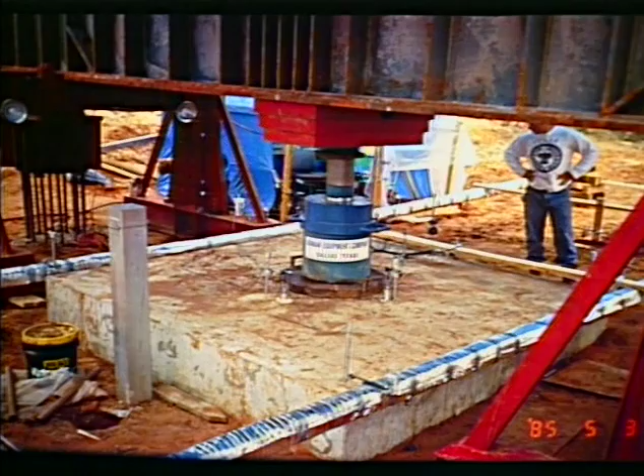The next few slides briefly go over a few research projects that are either ongoing or have recently terminated, to give you a feel for the type of research being accomplished in the department. This first project, many of you may recognize as a spread footing load test at the National Geotechnical site under the direction of Dr. Briaud. One of the hallmarks of the research here is very large-scale testing in the field.

This next slide is representative of a process that Professor Yeung has been working with in terms of extracting contaminants from fine-grained soils using a process called electrokinetic extraction, which I believe he learned at Berkeley under the direction of Professor Mitchell.

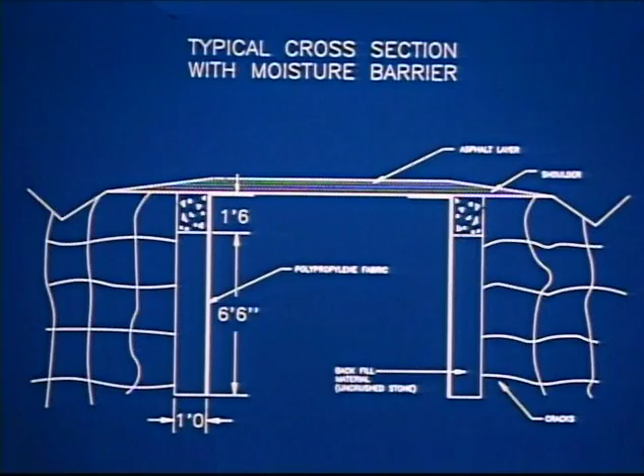The next slide is representative of a moisture barrier that prevents the migration of moisture into and out of the soils underneath an existing pavement, to prevent the heave and collapse of the pavement and its eventual breaking up. Our Professor Lytton has been working for many years on partially saturated soil mechanics and has developed analytical tools.

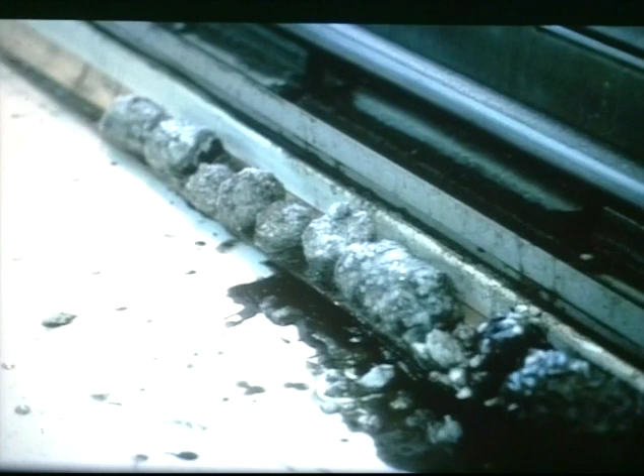The next slide is a picture of hydrates taken from the Gulf of Mexico. Professor Dunlap and Professor Briaud have completed a project looking at the identification and measurement of performance of hydrates in the Gulf of Mexico sediments.

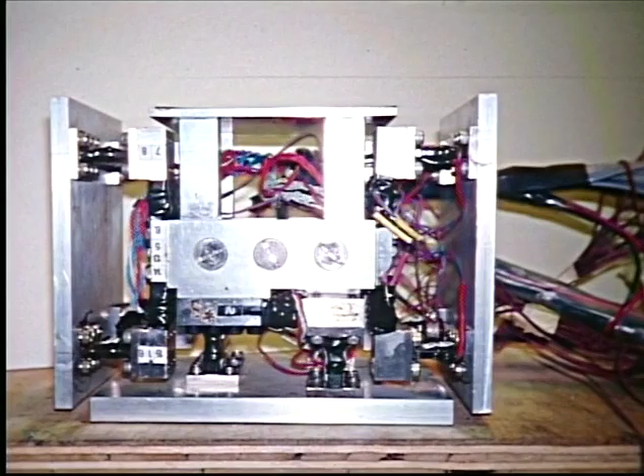Of course, for the oil industry, that's a major problem when they try to drill a well and bring hot oil through the hydrates. They get a phase change, release of gas, and it becomes a real problem in terms of foundations. And finally, we're completing a centrifuge modeling experiment looking at the fundamental behavior of a retaining wall in an earthquake.

This is a side view of an instrumented wall that was built, calibrated, verified, and tested at the Rensselaer Polytechnic Institute Geotechnical Centrifuge, capable of measuring interaction forces in terms of orientation, magnitude, and position along all interaction faces, the backfill, the base, and the toe soils.

In order to talk about the future, the first thing we need to mention is that our department has set a goal to become recognized nationally as a top 5 program. The last rankings that came out, we were about number 12, and we would like to up the ante and get into the top 5.

In order to do that, we have to recognize the nature of the Department of Civil Engineering and understand a process that can help us get to that goal. As a civil engineering department, because there are so many different disciplines, we stand at a crossroads, and it's very possible that if we all march along our own paths, we can diverge and not really accomplish anything.

Fortunately, we have been given some direction, and we have mechanisms in place that help us unify our approaches. In the future, I believe the most significant advances, at least in my tenure as a professor, will be in terms of solving large, complicated problems through integrated research projects.

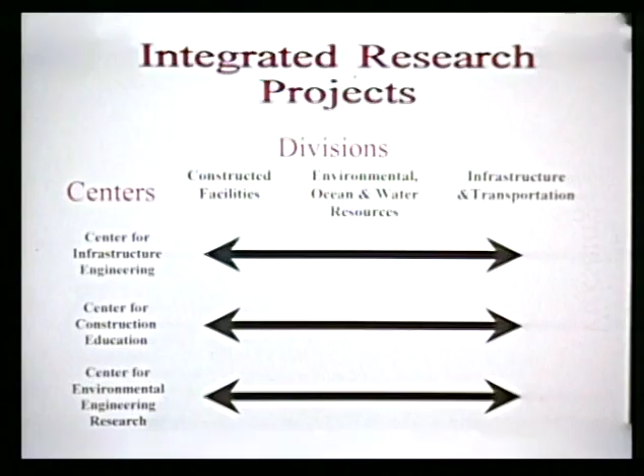For instance, there's a Center for Infrastructure Engineering headed by Professor Lytton that provides an opportunity for us to interact, the geotechnical people interacting with structures, water resources, infrastructure, and transportation. The purpose is to cut across divisional barriers and start marching in common directions. If we do that, we certainly can improve the already high quality of our program.

In terms of the geotechnical contribution to the goal of getting into the top 5, I've listed 5 potential ways we can do that. The first is that every bit of research accomplished at our university should be published in a national or international journal refereed by our peers.

The next thing we can do is go after research projects that are nationally competitive, meaning that if we want to break into this top 5 and there's a professor there submitting a proposal, we stand toe-to-toe with that person and get funded in some cases ahead of them.

In terms of our theses and dissertations, they should be competitive. We should be able to take a PhD thesis from the Department of Civil Engineering at Texas A&M and put it right next to one from MIT, and there should be no difference in terms of content, merit, or effort. That's something that will make us competitive.

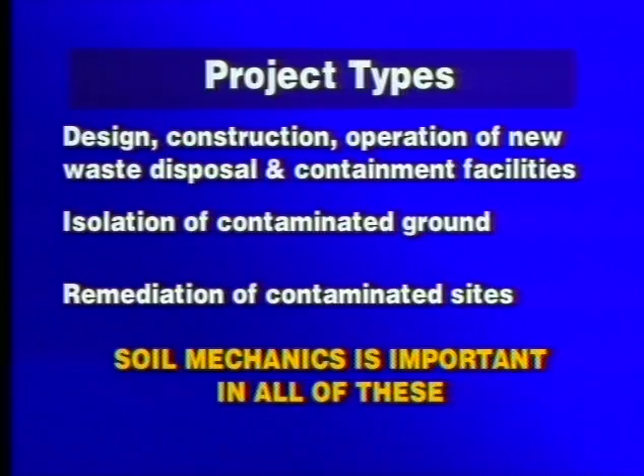And it's this kind of mechanics that I would like to elaborate on. There are a number of kinds of projects that dominate in the environmental geotechnical field: the design, construction, and operation of new waste disposal and waste containment facilities, the isolation of contaminated ground, and the remediation of contaminated sites. The whole point of this third Buchanan lecture is that soil mechanics is important in all of these. I could stop here, and if my message were completely absorbed and reflected upon, it would be over. But I want to elaborate a bit and show you by illustration why soil mechanics is important in all of those things.

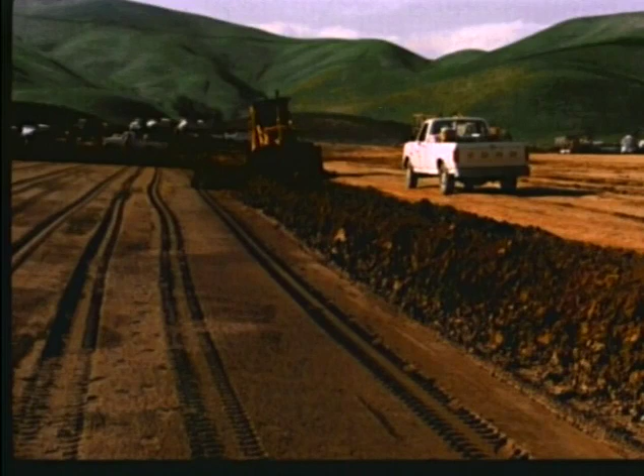Now, first, to give you an illustration of these kinds of projects, here is a new waste disposal project. This happens to be the Keller Canyon Landfill, located in the county in California where I used to live, a new municipal waste disposal facility completed about 2 or 3 years ago.

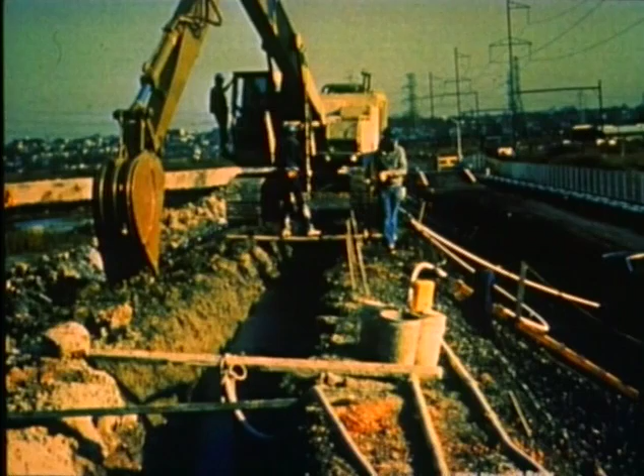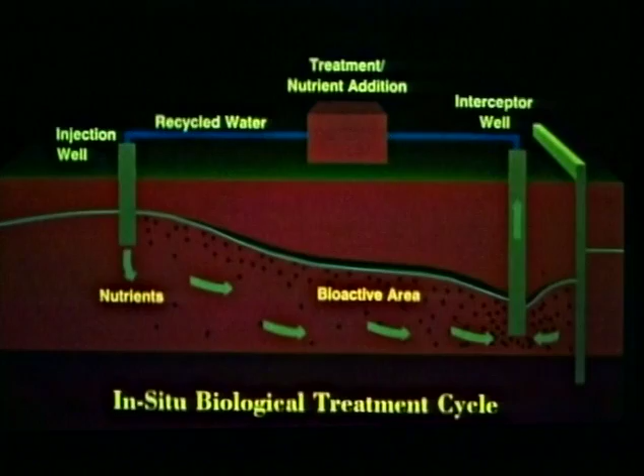For isolation and containment of contaminated sites, we often use things like slurry wall cutoffs, such as you see here. For remediation of the environment, we might use some sort of in situ biological treatment, or an electrokinetic technique of the type that Albert is involved in here in his research at Texas A&M. So these are three of the kinds of projects we deal with in our work.

This happens to be a very large above-ground landfill located in the center of Los Angeles, currently the subject of a great deal of study. I'll tell you more about that later.

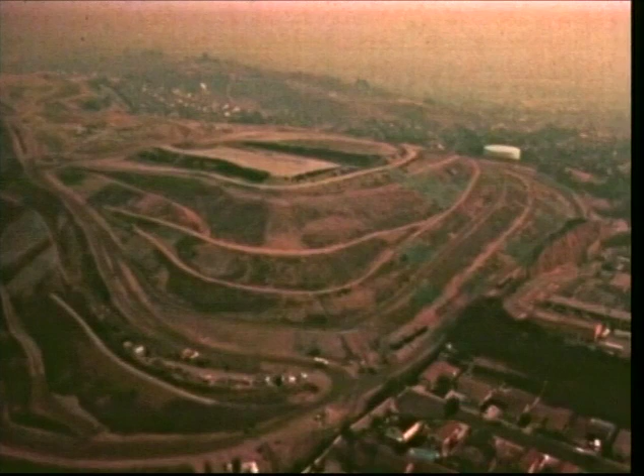Other kinds of landfill repositories are in the ground, such as you see here. Here is an illustration of a Class 1 hazardous waste landfill located in Central California. I'll have a bit more to say about this one as well. The waste is piled in here, contained within a lined, carefully designed and lined repository system.

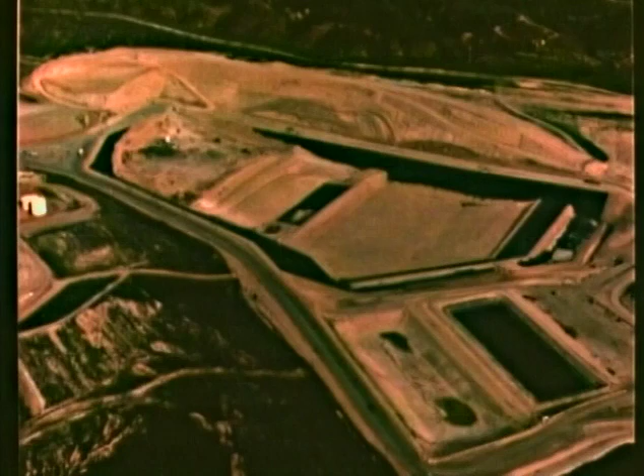We have a number of concerns with these waste landfills. We must contain the leachate, prevent surface water infiltration, maintain stability, and resist seismic shaking. You may think of some others, but we'll look at a few of these.

The landfill requirements have evolved very significantly over a 10-year period shown on this slide, from 1981 to 1991. If you look at this, it's waste over filter soil, over gravel with a perforated pipe, over clay, over subsoil. You can't do things that simply anymore. And even this is complicated compared to what I remember as a kid, where you had a town dump.

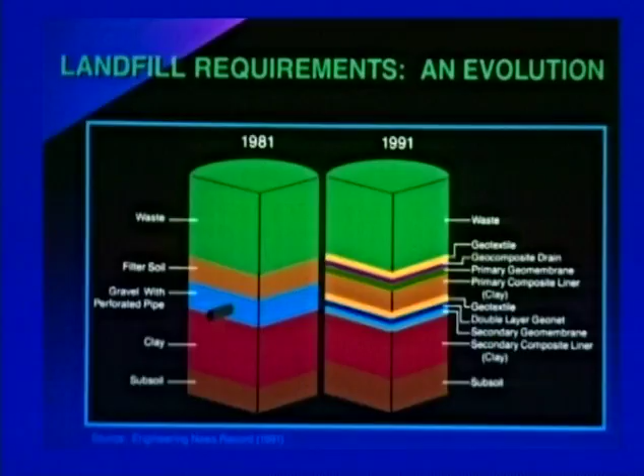By 1991, we were looking at complex composite systems of geosynthetics, compacted clay, collection and drainage systems, and so on, not only once but twice within a landfill liner, according to some legislative requirements. So there has been a real development into more complex engineered systems for lining landfills.

Similarly, for covering landfills, we have to turn our attention to what would make a good cover. In this cover, before you even get to the waste down here, you have some soil cover, a geomembrane to keep the water out, a bedding layer, a drainage layer to help things drain away, a filter to keep things from mixing up, and a topsoil layer so that you can grow things on top and leave a suitable facility when all is closed up and said and done.

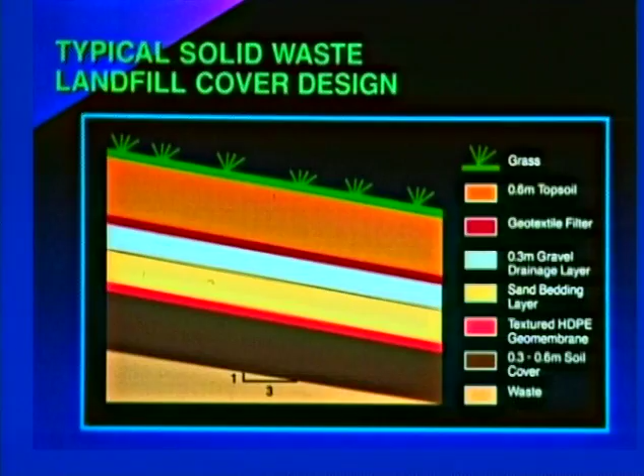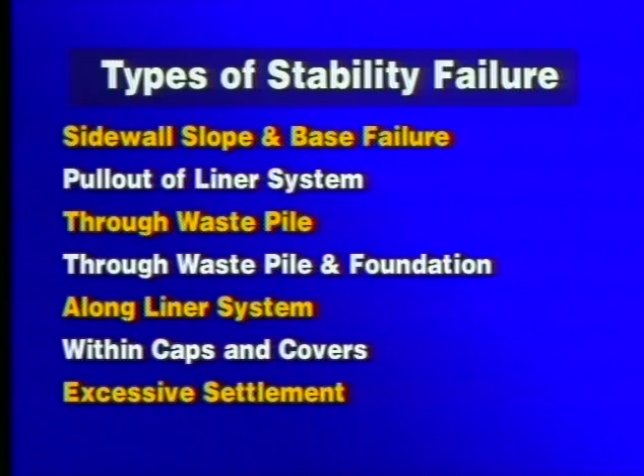One of the main problems that we have to deal with in landfills nowadays is that of the stability of different parts of the facility. This is a list of the kinds of failures that can occur in modern landfills, or existing old landfills for that matter. I'll show you by means of simple sketches what I mean.

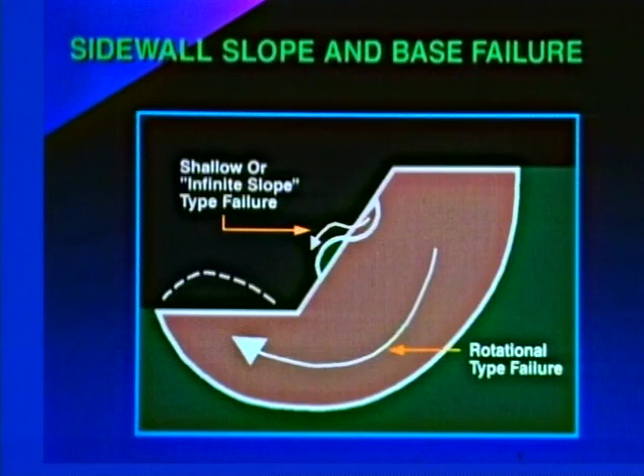Sidewall slope and base failure: when you have an excavation here, while the excavation is open, it's possible to have this type of stability failure or superficial failure. We have to worry about the pull-out of liner components coming down the side of our slope into the waste repository area, which could pull out of the trench and go on down the slope. There are techniques for designing against that type of failure.

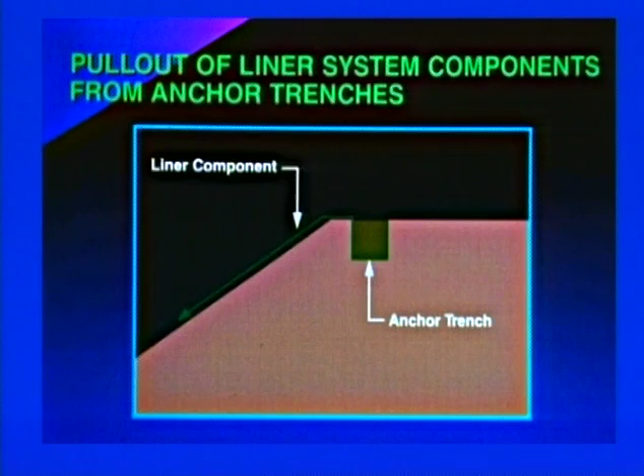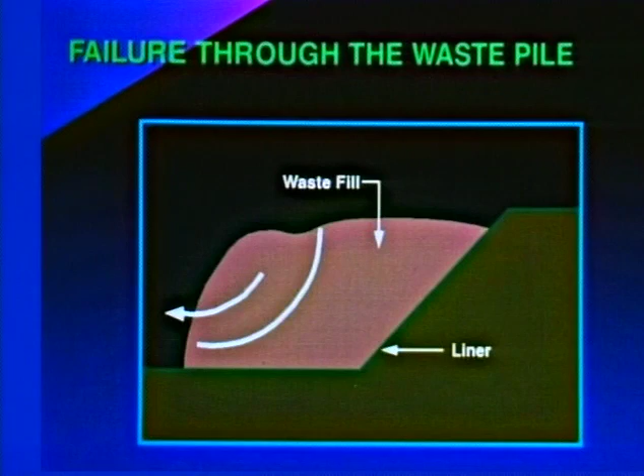We could have failure through the waste fill itself, such as shown schematically here. The failure could be more complex, coming through the waste fill, through the base liner, through the foundation, and so on. There are many variations on this possibility.

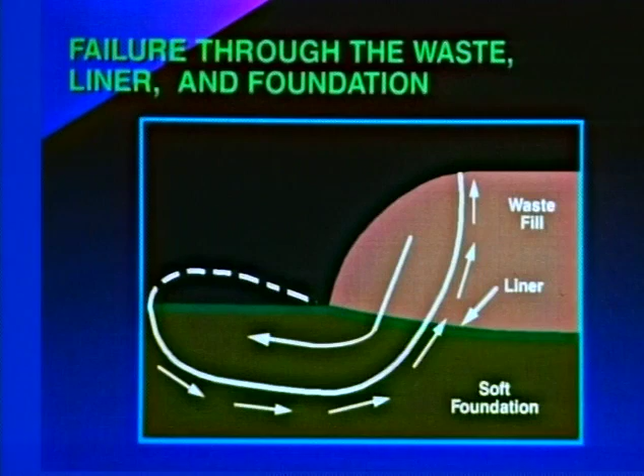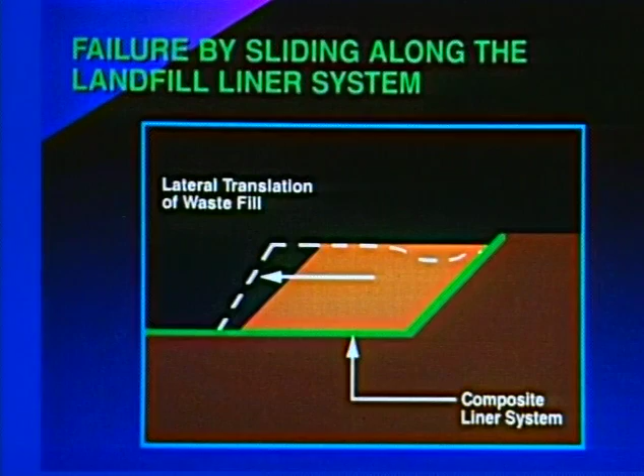It wasn't always that these kinds of stability considerations were taken fully into account, and you're going to see the consequences of that in one of the examples I will show you. It's an example showing this kind of stability failure, where the waste pile actually slides simply because it gets too high, and it can't be resisted by the resistance along the bottom of the lining system, and it moves and causes a failure. Those are the types of things we have with landfills.

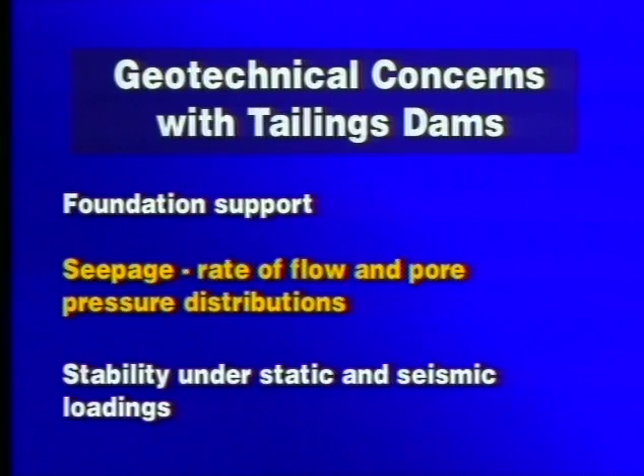We've chosen some cases of those kinds of systems for examination of the role of soil mechanics. We've looked also at some concerns with tailings dams, because these are important geotechnical structures as well in many parts of the world. We have a number of issues of concern here relating to foundation support, seepage, stability under static and seismic loads, and so on.

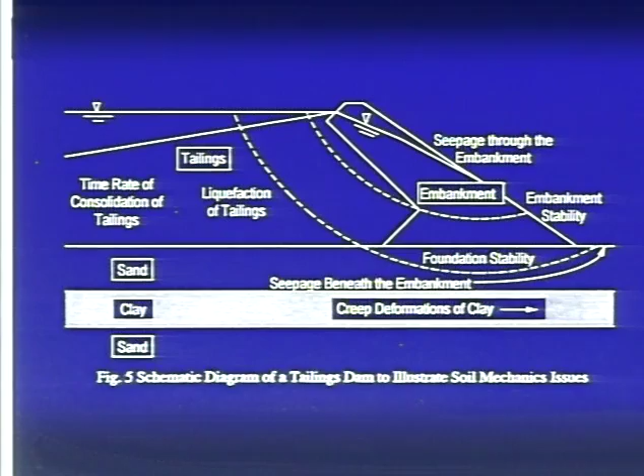In a tailings structure, there are a number of things we have to look at. If this is the tailings dam embankment, we have to be concerned about the stability of that embankment, the seepage through it, and potential creep deformations in the foundation. I know of a case where these are important. What about the overall stability of the foundation? How about the consolidation of the tailings?

Generally we want the tailings to consolidate for at least two reasons: one, they become stronger and thereby reduce stability concerns; another is that by consolidating, you gain more airspace above and can dispose of more tailings. In seismic areas, which seem to be very often associated with locations where mine tailings operations are in progress, we have to be concerned about liquefaction and its potential consequences on the overall stability of everything. So there are a lot of environmental concerns in dealing with tailings facilities, and many of these involve soil mechanics issues.

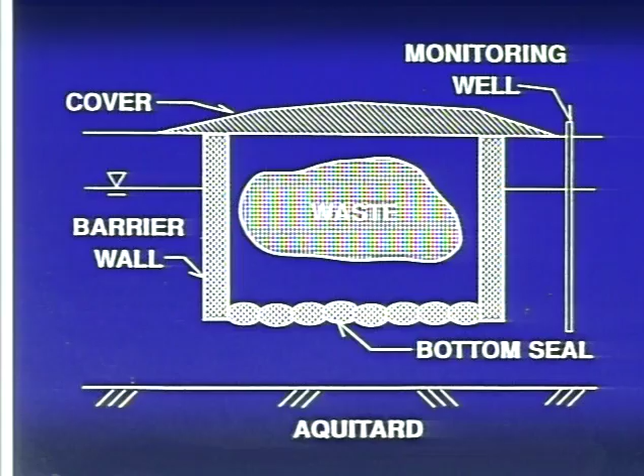A third category of environmental problem that we as geotechnical folks get much involved with is the in situ isolation and containment, safe containment of waste in the ground. Barrier systems of various types are now available. They can be built, and we need to know their characteristics—how perfect or imperfect they are as barriers against seepage flow out or in. We get concerned about the bottom, whether we can use a natural bottom or must put in an artificial bottom, and about the cover, all to be sure we can safely contain the waste in the ground. It's quite a technology in itself.

This is an interesting photograph. This happens to be the present day appearance of Love Canal in Niagara Falls, where much of what we are into now has its origins. If you recall a bit of history, back when all the ground pollution was discovered here in the Love Canal area of Niagara Falls, people were getting sick. Hooker Chemical Company was involved in all of this. They did massive restorations of the area, had to move people out, and clean things up. Now they have it contained.

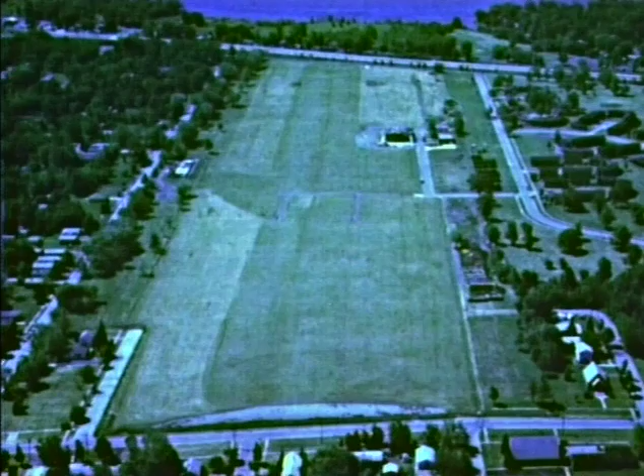This is a modern cover over the area that was most contaminated. Leachate is pulled out of this and treated in this facility over here. So this is a historical project from the standpoint of moving things in a particular direction for environmental regulation and environmental control.

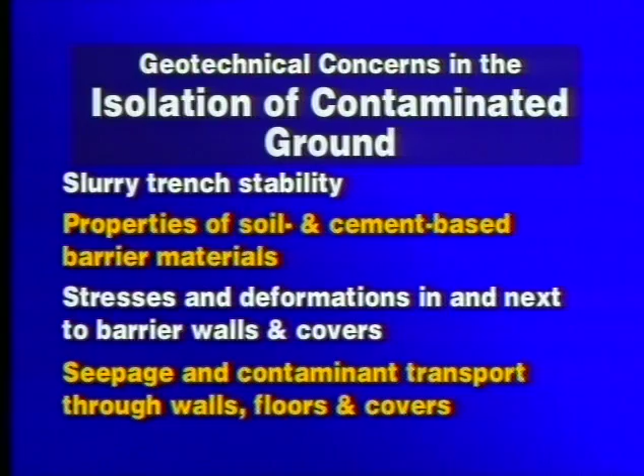In these issues of isolation of contaminated ground, we have a number of concerns: slurry trench stabilities, properties of soil and cement-based barrier materials, stresses and deformations in and next to barrier walls and covers, seepage and contaminant transport through the walls, the floors, and the covers.

These are things that geotechnical people are uniquely qualified to deal with. There is a lot of soil mechanics involved. I'm going to try to illustrate, by means of several examples, the kinds of issues that arise requiring good soil mechanics in solving these problems, interpreting what's going on, making predictions, as for any other kind of geotechnical engineering. I'll do this by considering landfills and some tailings dams issues, with a couple of other things that don't really fit those categories.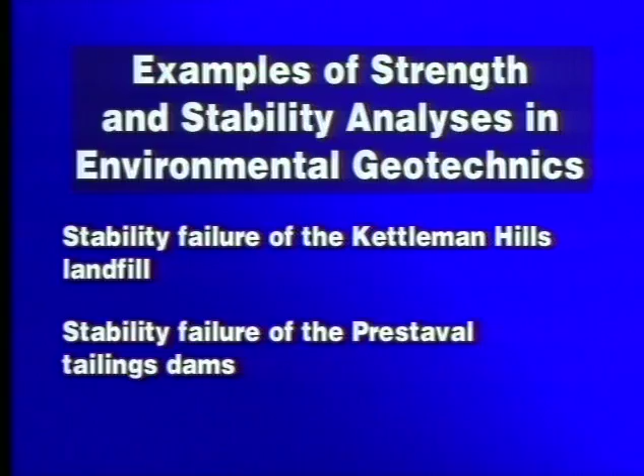Before I do that, I want to say one thing. I'm not going to be dealing with material properties as such in any detail in this talk. That's not to say I don't consider them important. In fact, I would say the two most important things you have to deal with in any of these problems are the site characterization and the properties of the materials themselves. If you don't do that right, anything else in the way of analysis will be absolutely meaningless.

Just as in our teaching of geotechnical subjects, we must spend a third to a half of our time talking about the properties of soils and how to measure them, express them, and deal with them in analysis. We have to do that because soils are so vast and variable in their characteristics and the ranges of materials we can run into. It's not like working with cement, concrete, or steel, which we can pretty much design to specification. So always keep in mind the importance of properties.

I'd like to show you a couple of aspects relating to strength and stability analyses and their importance in environmental geotechnics. First, a little bit about this landfill, the Kettleman Hills Unit B19 Phase 1 of a hazardous waste facility in Central California.

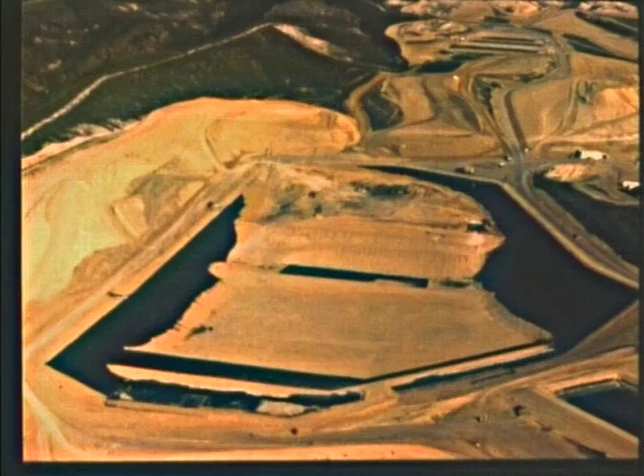What you're looking at is a waste pile photographed about 4 days before it failed by means of a translation in this direction of about 35 feet, a settlement back up here of about 15 feet, and a complete disruption of the lining system, as you will see in one of the slides. Note the shape of this runoff retention pond down here — I'll show you in another slide how it's distorted, to give you some perspective.

This waste pile is about 100 feet high — it was about 100 feet high. It covers, I can't remember the number of acres, but you'll see it on a slide. This side slope is 3-to-1, this is 2-to-1, and that's 2-to-1 in the back, just so you'll have some appreciation for the geometry. It's 50,000 square meters, fill depth was 30 meters. The side slopes, the toe slopes, were 3-to-1, with a nearly level planar base.

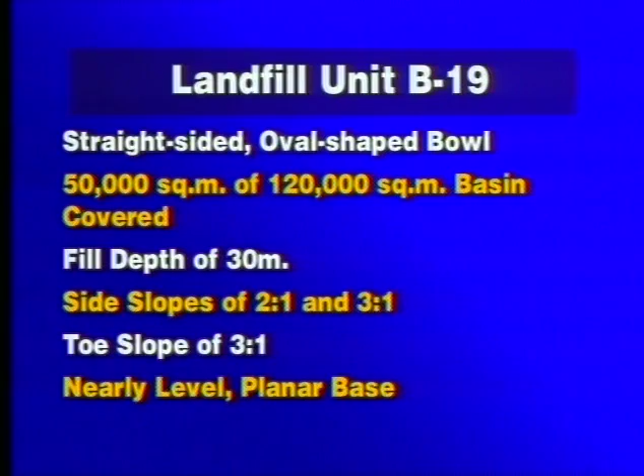It had about a 2% slope towards collection sumps for leachate in the base. It failed in March of 1988 by sliding, and you can see how everything is pulled down. It moved from your right to your left about 35 feet. This happened over a period of something like 5-6 hours on a Saturday morning, and was not catastrophic in terms of loss of life, but in terms of compromising the integrity of the lining system it was a very important event.

It's had a major impact on how we do landfills. If you look across here, you can see some cracking and so on. Trying to figure out the cause of this failure required looking at an awful lot of things in this particular system.

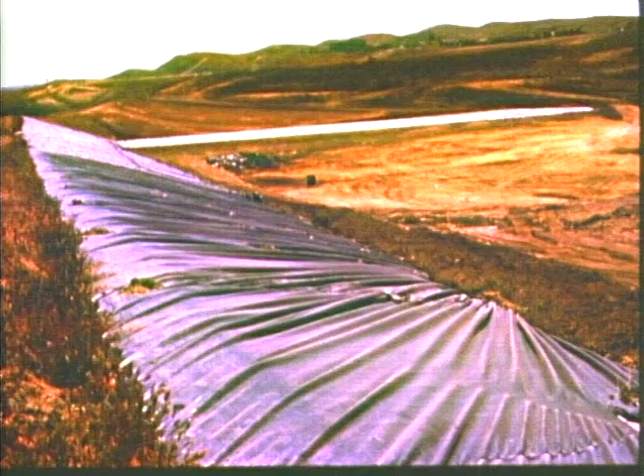You can see in this slide how the surface cover liner, which lies over the base liner, is distorted right here, and it moved in that direction through the valley. The lining system at this facility was a very complicated thing designed to current state-of-the-art standards and regulatory standards. Down here is a vadose zone monitoring system.

It's in the paper, so I'll go quickly over this: the secondary clay liner here with a high-density polyethylene flexible membrane layer, so it's a composite liner, with the membrane over the clay. Drainage collection removal system here. Primary clay composite liner up here, primary composite liner, compacted clay, 1.5 millimeter thick HDPE right here. So you see this is a real belt and suspenders operation with a double composite liner system for the leachate collection, removal, and so on. Finally, up here, the waste is collected on top of everything.

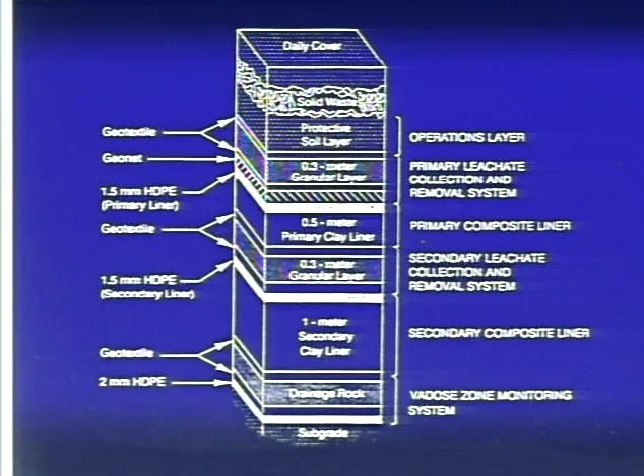As the investigation finally resolved itself, we know that the sliding took place right here, in the base of this repository, between the secondary FML, or the HDPE, and the compacted clay. Of course, we couldn't know that at the beginning. All we could be reasonably sure of was that it probably slid somewhere in the lining system.

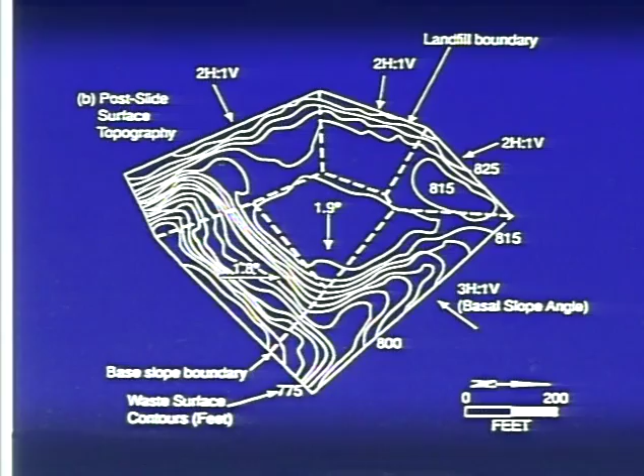This is simply a contour diagram of the waste itself before it failed and after it failed, and you can look at the topography. They're in the written version, and you can see what these were, and they pretty much support the movements that I told you about.

Trying to unravel the mysteries of how this failed and why it failed led us to an explanation which was basically correct in terms of how it slid, where it slid, and the like, but you couldn't be sure till they excavated all the waste out of the repository and moved it somewhere else. That took a couple of years after the failure.

By having some marker beds within the structure, we could learn something about the internal configuration of things and develop a model for the stability analysis of this.

But you might ask yourself, how will we analyze the stability of this? We're used to using a two-dimensional cross-section of some sort to do the stability analysis. Where will you take that section? That becomes critically important. Or should we look at the whole thing as a three-dimensional mass? We had to consider all of that, and in the end, it was necessary to do some three-dimensional analyses and resolve the issues, getting some idea of how well they compared with the two-dimensional results.

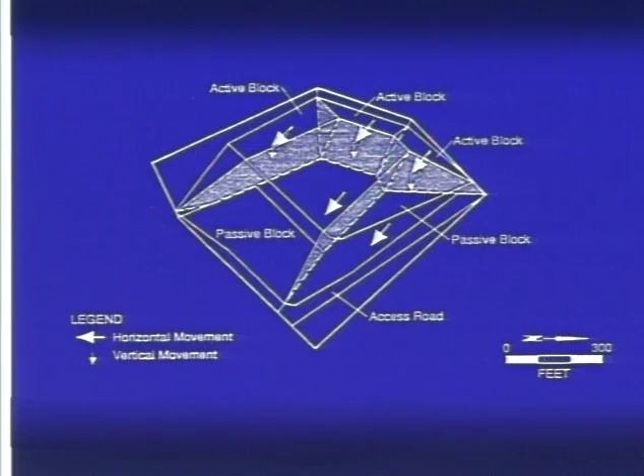Basically what you're looking at is a situation where you have a waste pile with this configuration, and these blocks of waste are sliding down. There's waste that sits in the bottom on top of the liner, which is a passive block holding it back, and you have things coming down from the rear, sliding in from the side, and so on, all pushing on this. In the end, the final analysis showed us that simply the pile of waste got too high and the driving forces exceeded the resisting forces.

And of course, you don't have to be a rocket scientist to know that things fail when the resisting forces aren't as great as the driving forces. But still, writing it all out, or analyzing it all in a quantitatively satisfactory manner, was a bit of a challenge.

Looking at this thing in plan, you have waste coming down the slope, waste coming down the slope, waste coming down the slope, and this block in here resisting it. There are configurations, there are geometries, when these forces simply overwhelm the resisting forces and the thing slides. So when you have a repository with diverging side slopes, as was the case here, you can have a critical three-dimensional case that leads to failure.

Without going into the details of that failure, we can draw certain conclusions that are important to us in dealing with the stability of waste repositories. In the written version, we were careful to include references to all of these things, so that anybody interested in pursuing any of the subjects in further detail can find them in the references. For those interested in this subject in general, and for students, we've tried to include references to fairly recent publications that are comprehensive, providing an entree into a vast array of relevant previous literature. So hopefully that will be helpful.

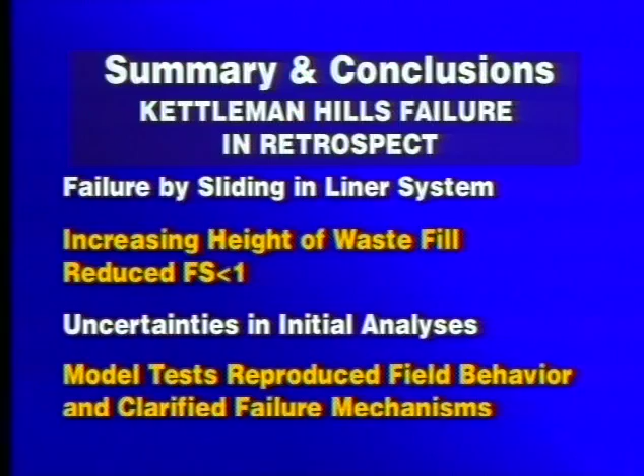We had a lot of uncertainty in our initial analyses, and that led us to do model tests, which reproduced the behavior and clarified the mechanisms very nicely. We developed a new 3D stability analysis method, which predicted both the model and field behavior. That is a method for 3D analysis limited to analyzing waste masses on defined sliding surfaces. You can't do a general search for a critical surface, but if you know where the sliding is likely to take place, you can do the analysis with this program.

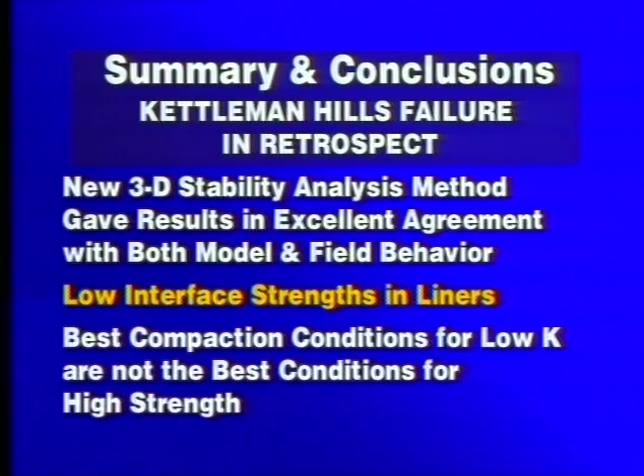We certainly learned all about low interface strengths in liners, and I think this was an important focus as a result of this work. Before the Kettleman Hills failure in 1988, concern in landfill liner systems seemed to be with low hydraulic conductivity - keep the hydraulic conductivity low. So you compact the clay wet of optimum moisture content to get the low hydraulic conductivity, but when you do that, what you get is low strength too. It's optimum for hydraulic conductivity, but it's one of the worst places to compact it for strength considerations.

When you're dealing with clay compacted wet of optimum, or geosynthetic liners with geogrids and flexible membrane layers and things of that sort, you're dealing with material with very low friction angles, down as low as 8 degrees or so. And remember, the side slopes in this landfill repository were up to 26.7 degrees on that 2-to-1 slope.

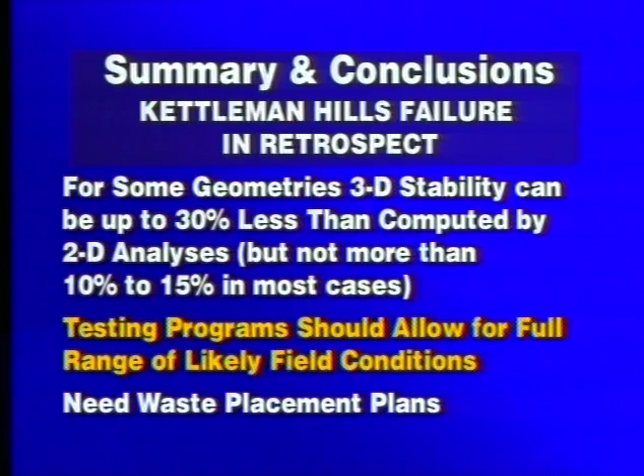We found this condition relative to geometries and stability: typically the two-dimensional analysis will be okay unless you have divergent side slopes, in which case you can have lower 3D factors of safety than 2D. So if you're looking at a situation like that, be conservative if you're going to base a design on a 2D analysis. These things, I think, are now fairly obvious, as shown here. So those are some of the things we learned about from Kettleman Hills.

Now let's turn our attention to a tailings dam failure - a limit equilibrium analysis situation where soil mechanics limit equilibrium would have paid rich dividends. I hope you forgive me if I read some of these things. We took the liberty of finding illustrations not totally from our own experience, but including also some relevant cases in the literature, and this happens to be one of those cases.

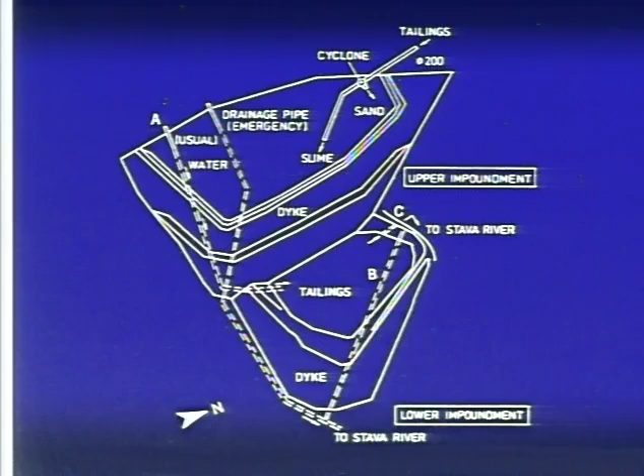In June of 85, the decant pipe for the lower embankment, which had been draining everything out, broke and drained all the free water and liquid mud from the lower impoundment. They repaired it by blocking up some pipes, installing new bypasses and the like, and refilled everything on the 15th of July in 1985.

Four days later, after they filled it, there was a failure that took out pretty much all of this. There was a slide of the upper dam, which pushed away nearly the entire body of the lower dam and caused a catastrophic failure. The number of deaths was several hundred, as I recall. It was quite a catastrophe in Europe, the worst of its kind to date.

Following the failure of these Prestavel tailings dams, they did their analyses. There were uncertainties in properties that resulted in uncertainties in calculated factors of safety, but what they came out with were factors of safety for the lower embankment in the range of 0.92 to 1.4. They calculated factors of safety up here in the range of 0.7 to 1.3, with a mean of about 1.0.

In other words, at the time of failure, the analyses done post-failure said there should have been a failure, such that any slight change in geometry or loading conditions would trigger a failure at that particular point where it actually took place. Berti and others, in the references given in the paper, concluded that there were shortcomings in the design, construction, and operation of these dams.

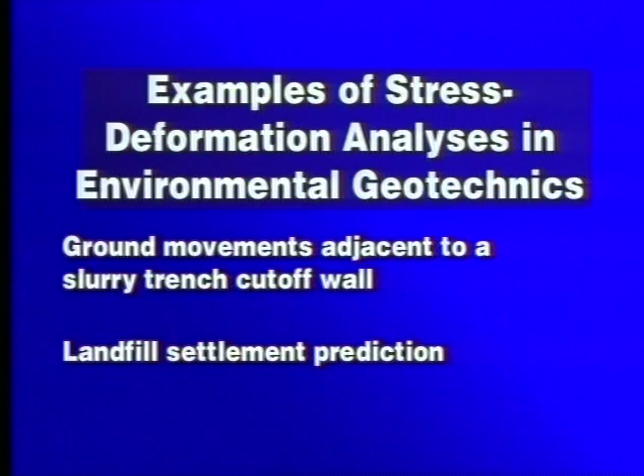We aren't necessarily always concerned with catastrophic failure or limit equilibrium conditions. We may many times be concerned simply with stress-deformation analyses, and there are situations in environmental geotechnics where these things are important. I'll tell you briefly about two things: ground movements adjacent to a slurry trench cutoff wall, and landfill settlement prediction.

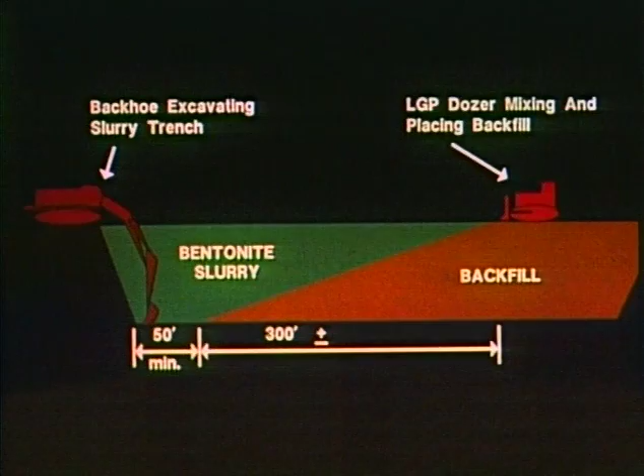The first is going to be in relation to a slurry trench cutoff wall. This was a wall constructed at a contaminated site in Silicon Valley, California. The purpose was to prevent on-site chemicals from moving off-site in a down-gradient direction, and to prevent up-gradient off-site chemicals from moving onto the site. We don't want our neighbors' chemicals on our site, and they don't want ours on theirs downstream.

There was a building located adjacent to the trench that was built at this site, and deformations around the trench caused severe damage to that building. It caused them to shut down manufacturing operations. The building was badly damaged, and the inevitable lawsuit resulted.

I'm going to show you more details of the stratigraphy at the site in connection with a groundwater issue that I'll talk about in a bit, so I won't do that now. I'll simply tell you that the wall at this site was 30 meters deep.

It was intended, as I indicated, to isolate waste within and prevent stuff coming in from without. The wall width was something of the order of 0.9 meters, a 3-foot nominal width wall, and it was 1,000 meters long, surrounding the site.

The technique used for constructing the wall, to half its depth, was the backhoe kind of arrangement that I showed you in the preceding slide. The bottom part was constructed using a clamshell for excavation purposes.

The stability of the trenches here was maintained using a bentonite water slurry. After excavation to the appropriate depth, the excavated material was mixed with bentonite, 2% bentonite, mixed up to about 125 millimeter slump, and put back into the trench, displacing the slurry in order to make the slurry cutoff, or soil-bentonite cutoff material.

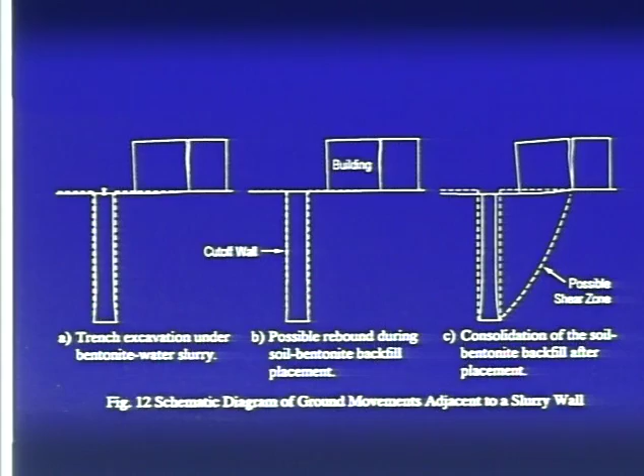There was some suggestion in one section that it was very near to failure, in a manner something like this. The upshot of the whole thing was that the building underwent excessive distress.

Now, the analysis of those deformations and their predictions is not a trivial exercise. It's a difficult problem that is being looked at now, especially by my colleague George Filz, who wrote up this particular part for us. He was much involved at the time and is continuing research on the behavior of slurries and slurry backfills in these slurry trenches, in an attempt to, through rational analysis and understanding of properties, come up with better predictive schemes for figuring out what's going to happen when you make these kinds of cutoffs. That's particularly important when you have structures or other developments adjacent to whatever it is you want to do.

That's one example of deformations.

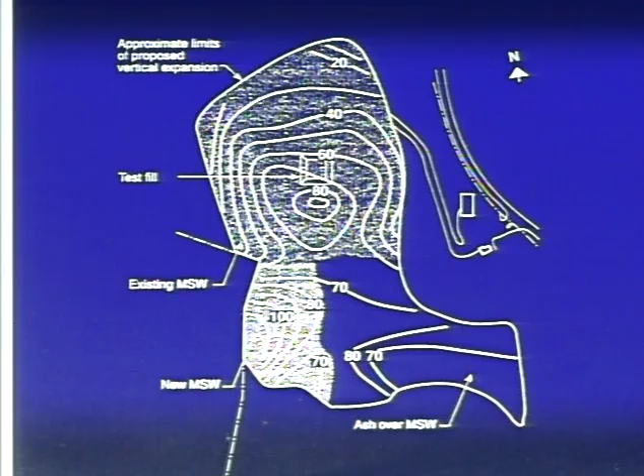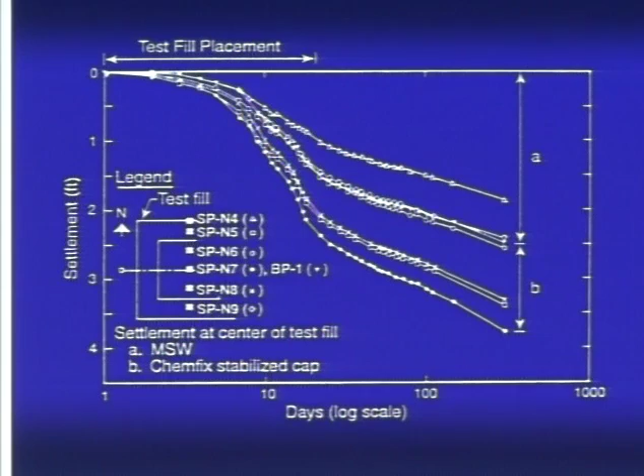One of the ways they got information about the compressibility of the waste was by means of a test fill. From the test fill, they got these settlement contours, or settlement patterns, as a function of time for different parts in the fill, at different times - 10, 18, 20-something, 99 days after putting the load on the test fill. This provided field test information about the time rate of settlement of this municipal waste landfill under loads, and showed the contour distribution across the landfill.

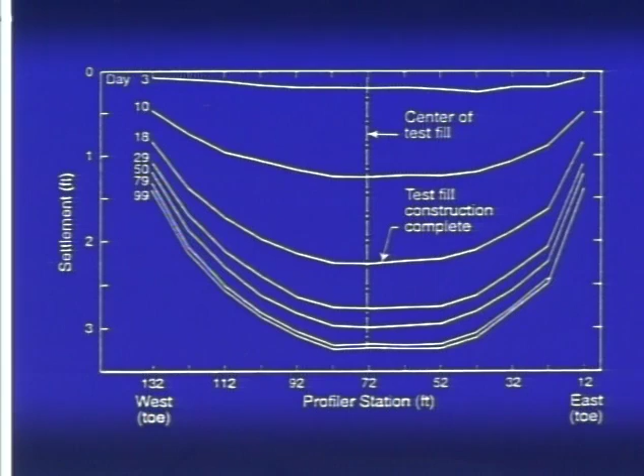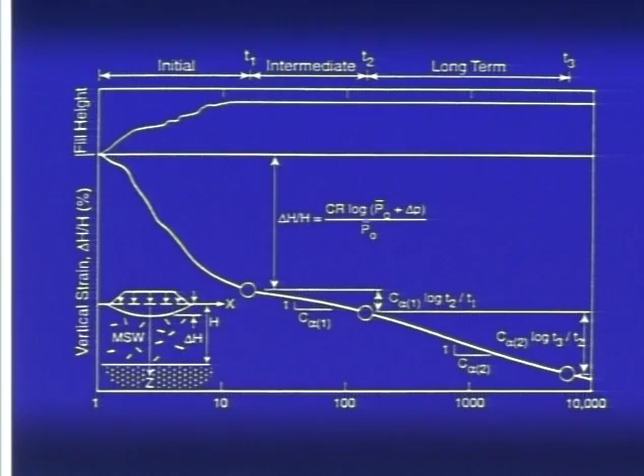And the output of all that was guidance for them to be able to go ahead and work out the design schemes for the collection, removal, and gas systems, and all of those kinds of things that were needed.

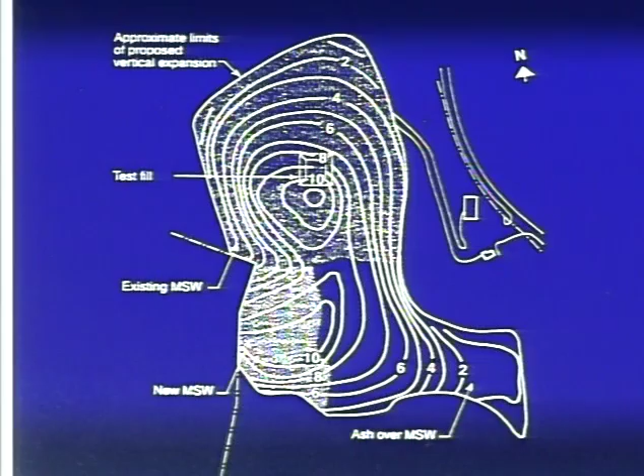Now I will show you two examples of seepage and contaminant transport and their important role in environmental geotechnics. There's an interesting aspect when you get into seepage. If you think about a lot of the work we do, we get very much concerned with seepage quantities. We need to know about pore pressure distributions and the like, often for analyzing dewatering issues or perhaps leakage through a dam. We are very often forced to deal in terms of quantities to the nearest, say, half an order of magnitude, because of the great uncertainties in predicting hydraulic conductivities and flows in real situations.

It's a very difficult problem, and we can live with that in many cases. The problem when you're confronted by some environmental problems is that if contaminants are being transported from one place to another, you may be looking at concentrations of parts per million or parts per billion to satisfy some regulatory requirement. You have to try to be much more precise in what you're calculating and estimating. I'm not sure we really can be much more precise, but you at least have to try to know your properties better and better model what's going on.

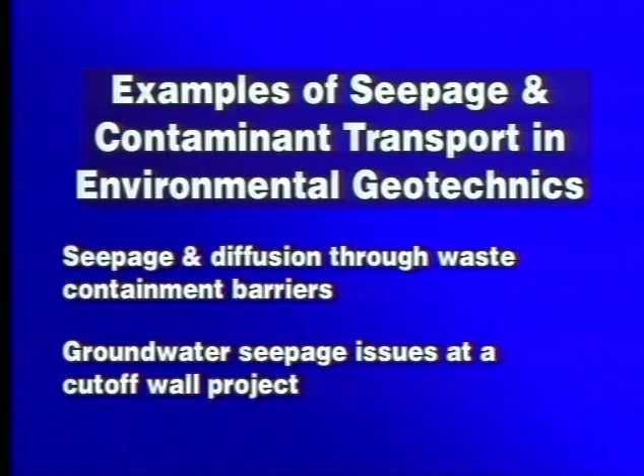The next point I want to make with respect to seepage and contaminant transport is that diffusion through waste containment barriers may be a very important component of contaminant transport. We have to broaden our traditional soil mechanics way of thinking of just advection, which is contaminants carried with flowing water, to include also diffusion, which is chemically driven flow, because it can be important. I want to show you a case that illustrates this.

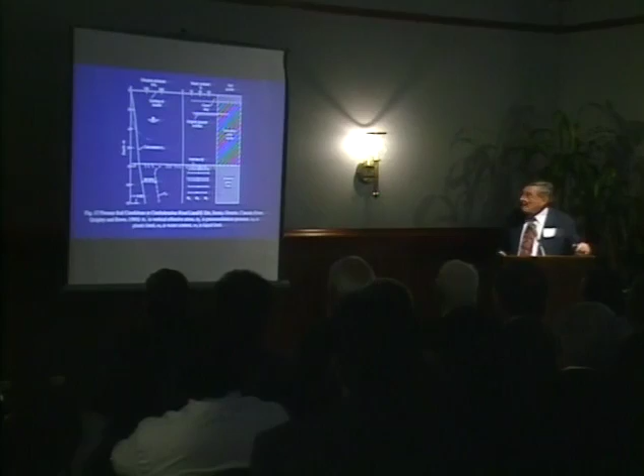This is reported by Quigley and Rowe and others in related papers working out of the University of Western Ontario. They analyzed what was happening at a site where domestic solid waste had been placed over a massive gray clay, the bottom seepage barrier at this location in the Sarnia, Ontario landfill. The properties of the soil are shown—plastic limit, water content, liquid limit, pre-consolidation pressures, and pressure distributions—and the waste is piled up to a depth of about 7.5 meters.

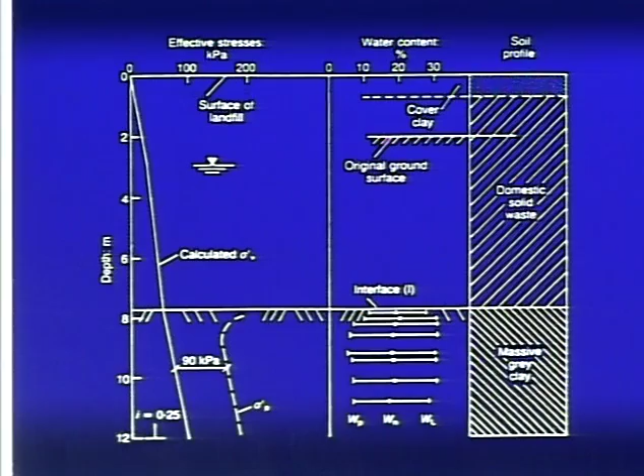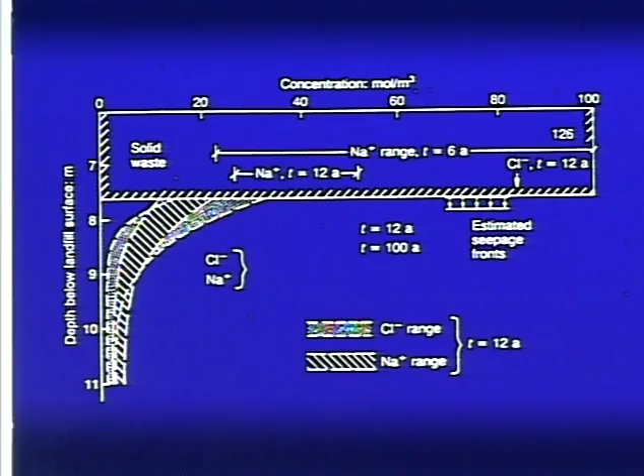The important thing is to note the migration of salts from that waste by diffusion, compared with what was transported by seepage, just moving with the seepage front. The hydraulic conductivity of this material was about 1 times 10 to the minus 10 meters per second. After 12 years, the seepage would have extended down to about there, and after 100 years, the estimated seepage would have gone to about there. But look at where the chemicals had gone—they'd gone way on down here. This happens to be chloride and sodium that they were tracking out of that landfill, and you can see the concentrations have migrated way down.

The reason for that at this site was chemical diffusion, which was moving faster than the actual fluid flow. It's an important consideration when we deal with barriers, because with barriers we need hydraulic conductivities less than about 1 times 10 to the minus 9th meters per second. That's the range where diffusion starts to become very important relative to simple advection.

The second example under seepage relates to our wall back in Silicon Valley, California. Remember, that was put in to cut things off, as you can see here. These are aquifers and aquitards, and the wall was intended to cut off the seepage passing through the A aquifer and the B aquifer right here. In the paper itself, for those interested, there's a typographical error on page 20, about a third of the way down, where I used the word aquitard when I should have said aquifer, the A and B aquifer.

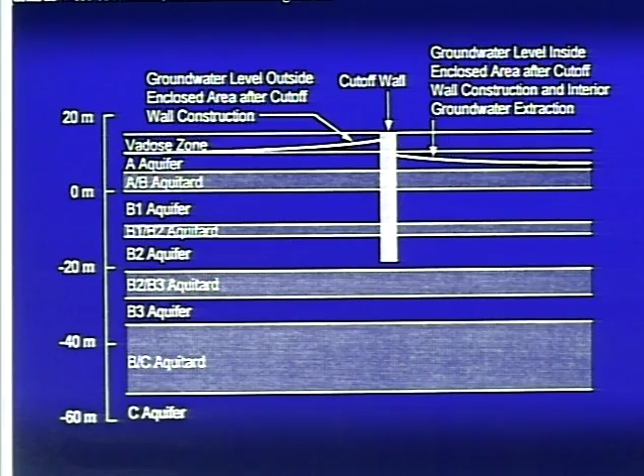In any event, the wall was constructed to cause a blockage of the flowing groundwater here. They lowered it some in here by groundwater extraction. The damaged building actually sat right here—that's the damaged building we looked at before. There was another building over here that wasn't damaged much at all. But among the things intended was to isolate things.

So this case illustrates the importance of groundwater seepage and the impact that complexities in stratigraphy and geohydrologic conditions can have on contaminant transport. We need to keep those kinds of things in mind. These are the bread and butter kinds of things that come out of our traditional soil mechanics and how we apply it to problems. We need to use good mechanics in solving the problem.

Well, the last category of examples I wanted to show you were those for geo-environmental projects in seismic areas.

As John Louis indicated in his remarks earlier this afternoon, we have lots of expansive soils, and they are getting attention, as rightfully they should. They don't get the front page news though, that does something big and bad in a seismic area, because there is indeed loss of life often associated with it.

With earthquakes there can be catastrophic failures, and so they do get a lot of attention, including landfills. They are written into some of the regulations for municipal landfills, it's Subtitle D of the RCRA regulations for the design, construction, and operation of landfills. These kinds of things have to be taken into account when dealing with building a landfill, evaluating a landfill, closing a landfill, and the like. These problems come up both with landfills and with tailings dams, and they're the kinds of things that modern geotechnical earthquake engineering analysis can be helpful for.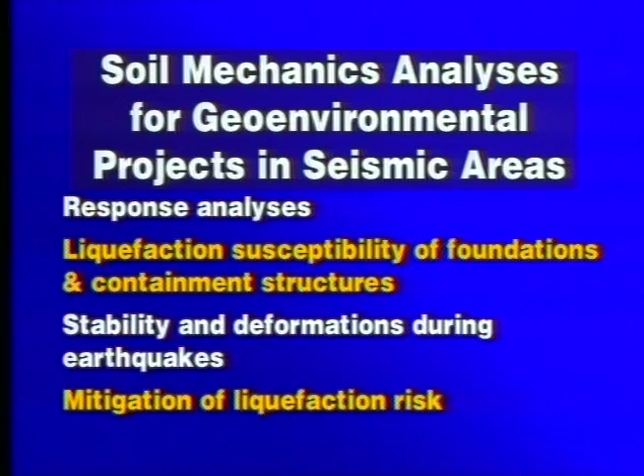We're going to look at two examples very briefly. First, the analysis and performance of the landfill, and then the seismic liquefaction of the El Cobre tailings dams, a very interesting early case of a tailings dam failure caused by earthquakes.

Here's that landfill back in Los Angeles again. That's the one I would like to talk about from the response analysis standpoint. This is 300 feet high. It's the OII landfill, in Monterey Park, California, which is sort of in the central area of the Los Angeles region. And here's a freeway - there is concern about an earthquake that could cause stuff to land on the freeway.

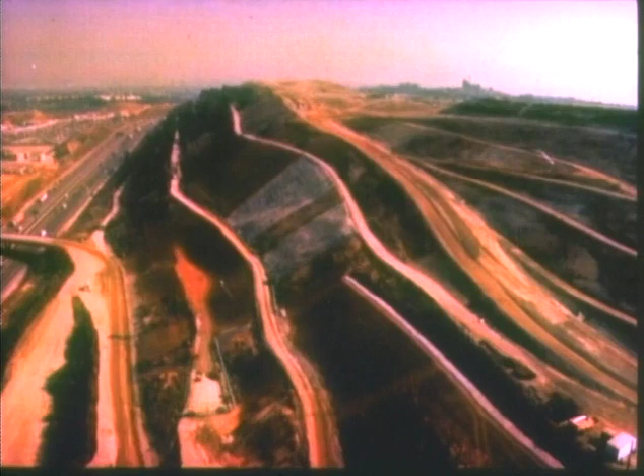There is another area where there is a buttress wall with a residential area at the bottom. There's concern about that too. It's a Superfund site that needs to be closed permanently, and a cover needs to be placed over this whole thing, a suitable approved cover. A lot of work is going on with this particular landfill at the present time.

It contains some 27.5 million cubic meters of municipal industrial liquid waste, soil cover layers to waste and cover layers down to a depth of about 100 meters. Among the things that have been done is to back calculate how this responded in both the Northridge earthquake in 1994 and the Landers earthquake in 1992.

The Landers earthquake was a 7.4 magnitude, the Northridge was a 6.7. One of the problems we have in dealing with these things is we don't know the properties of the waste properly to do the response analysis. So people have back calculated what is going on to try and figure out how the response will really be, and then compare it with the way that it really was.

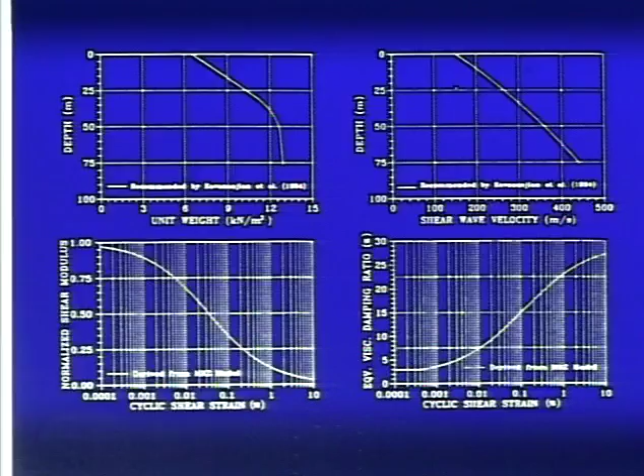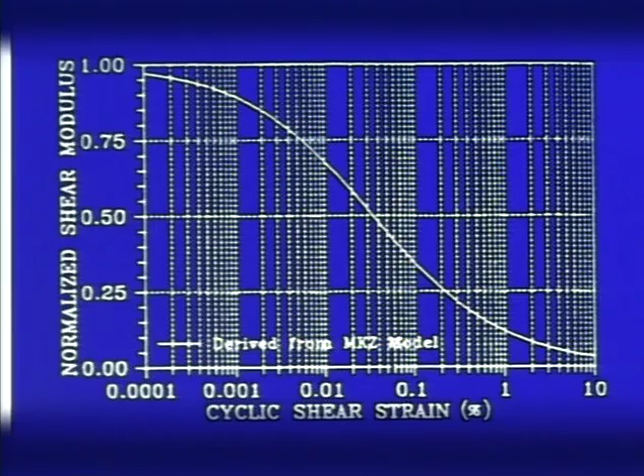These are some properties that were used for the analysis of the seismic response of the OII landfill, taken from a paper by Kavazanjian and Matasovic, written in 1995. This is simply the depth and unit weight relationship, the shear wave velocity as a function of depth, the modulus as a function of shear strain, and the damping as a function of shear strain - all things one needs to do in order to make analyses.

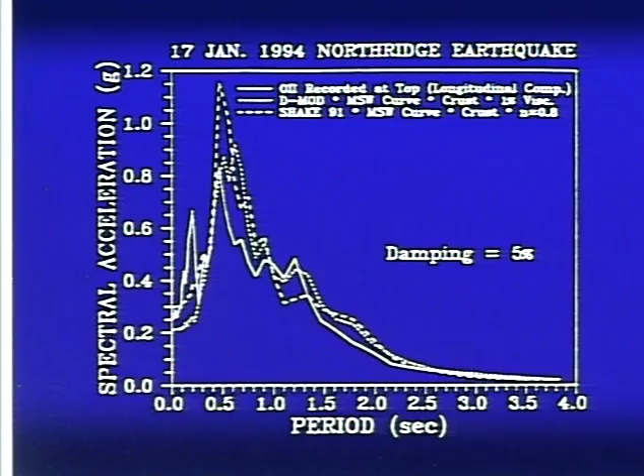The significant thing about their analyses was that by taking the earthquake response spectra, which is the solid line for these two earthquakes, and doing the calculations, they could reproduce reasonably well what happened. What is learned by doing that is that by assuming reasonably correct properties, we can predict reasonably well what went on. That gives you confidence for extrapolating now to other cases, to other landfills and so on, because we have, in a sense, validated some of the methods and assumptions that have been used.

Matasovic and Kavazanjian were able to draw some conclusions that are helpful in making that step, because we simply don't have a large amount of data on these properties. This is how they're helping to build our repository of information by using back analyses. Among the things that were found were that there was amplification of the ground motion. One of the things we like to look at when there are earthquakes is, how did the ground respond - the ground acceleration - for a given bedrock acceleration at a particular site. That has a tremendous impact on how structures fare, like landfills or buildings or bridges or anything else.

Because we know that under some conditions, the rock accelerations, looking right here at point 1, if the ground surface acceleration would be the same, would fall on this line right here. But in Mexico City in 1985, the Loma Prieta earthquake in 1989, the 1979 Montenegro earthquake, and so on, these zones are all above this line of 1-to-1 equivalence, which means the ground has amplified the shaking. So it shakes much more up here than it does at rock, and that has severe consequences for the structures.

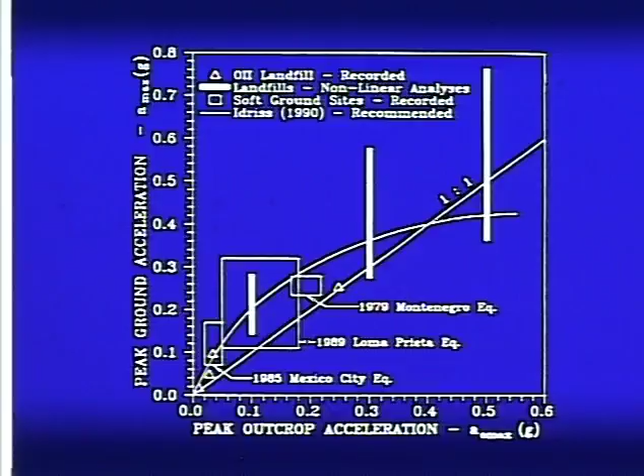And what they found in looking at the landfills was that they are equally well amplified. So that needs to be taken into account. The landfill can amplify things. This was certainly true, not at a different kind of landfill, but in the recent Japanese earthquake in Kobe, where the hydraulic fills placed for artificial islands really amplified the ground motions to the point of liquefaction.

Now the last case is that of the dams at El Cobre, a rather old case history. It happened in 1965, the earthquake in Chile. It shook the provinces of Aconcagua, Valparaiso, and Santiago in central Chile in March of 1965, and most of the tailings dams in that region failed. There were two dams at El Cobre where the failure was particularly devastating, and 2,400,000 tons of tailings flowed out, traveled about 12 kilometers in a matter of minutes, destroyed part of the town of El Cobre, and killed more than 200 people.

In 1965, there really wasn't much seismic design of dams. Not too much seismic design had been undertaken at that point. It wasn't a developed part of the field. Since then, a lot has gone on, and more recently, of course, we pay a lot of attention to this.

Tailings had been deposited there since the 1930s at El Cobre using the gravitational method. They deposited the tailings at the downstream crest of the dam—they didn't use a cyclone, they allowed the material to flow upstream. These were methods that are no longer used so much, and the back analyses tell why these kinds of things are no longer used—it's just not a good way to build a dam.

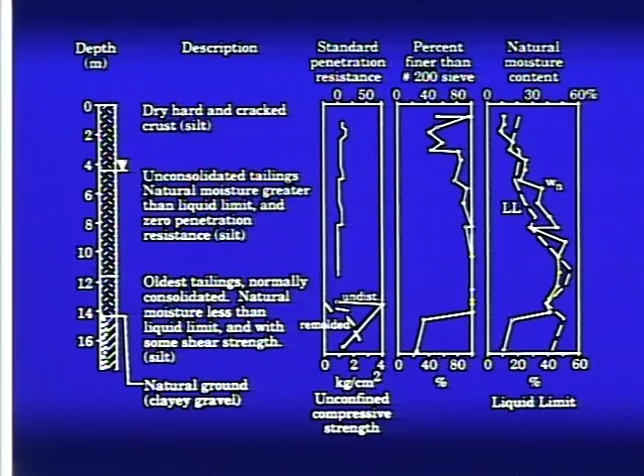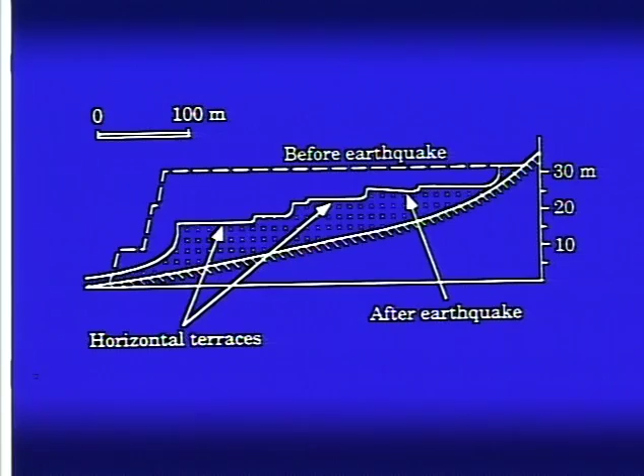A post-failure investigation was done at one of the dams—this was the small dam, the one that didn't fail. The materials involved were unconsolidated tailings, a dry hard crust, old tailings, and firmer ground below, and you can see the standard penetration resistance was really quite low. This was pretty fine grain through this weak zone, which tells you something about the moisture content. The general nature of the failure was that you had a structure that looked like this, and after the earthquake it looked something like this, with horizontal terraces and scarps as the material flowed away.

This was analyzed by Dobry and Alvarez in ASCE in 1967. It's an excellent paper describing all of this, and they were very ahead of their time in trying to analyze this thing. They used a technique which maybe by today's standards would look a little bit crude, but I think it pretty well captures what they concluded went on.

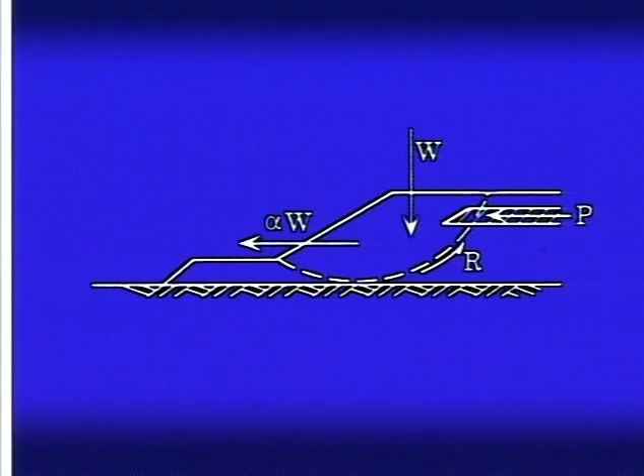The seismic horizontal accelerations gave an inertial force within the potential failure material. There also was material that tended to liquefy further back, giving an additional horizontal thrust, and put together that whole thing would cause it to fail. While maybe crude compared to a modern-day dynamic deformation analysis, from a limit equilibrium standpoint it explains very nicely what went on. This kind of approach is usually done in some form or other, even in modern analyses, before moving on to the more involved dynamic deformation analyses.

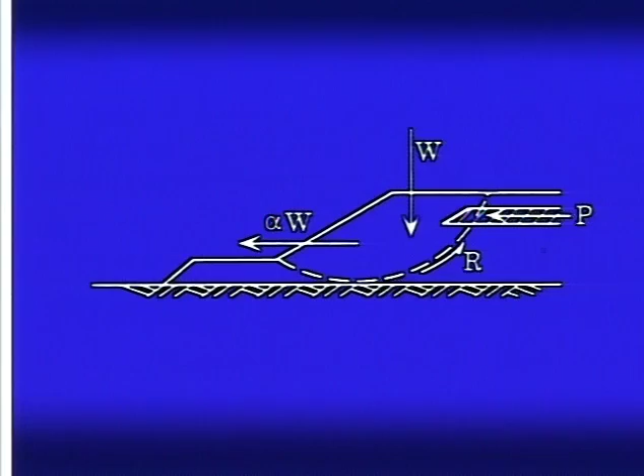But the ability to do stability analyses, figure out which are the forces and where they act, is an important part of doing all this, and of course, that is soil mechanics. What strikes me as interesting is the similarity between this kind of topography and what was observed both at the Turnagain Heights landslide failure in Anchorage, Alaska in the 1964 earthquake, and at the Lower San Fernando Dam failure in Los Angeles in 1971. A lot of similarity between those two things. This was one of the pioneering studies done to get people started looking at those kinds of failures.

So that gets me to the end of the cases and essentially to the end of the presentation. I've listed here a few conclusions, all trying to say the same thing in these environmental geotechnical problems: soil mechanics plays an important part, and we need to do the best job we can, along with our site characterization and materials characterization, to get answers that will guide our judgment and enable us to make decisions suitable for safe and lasting projects.

I've listed a few more specific points here. We have demanding criteria for these things. There are regulations, and we have to deal with them as best we can. We have to understand our stability, our seepage, our deformations, and our settlements. The principles of soil mechanics, waste mechanics, and geosynthetics mechanics are all part of the same thing.

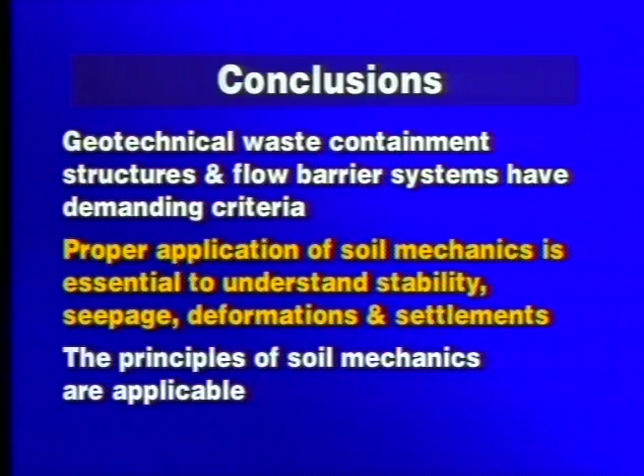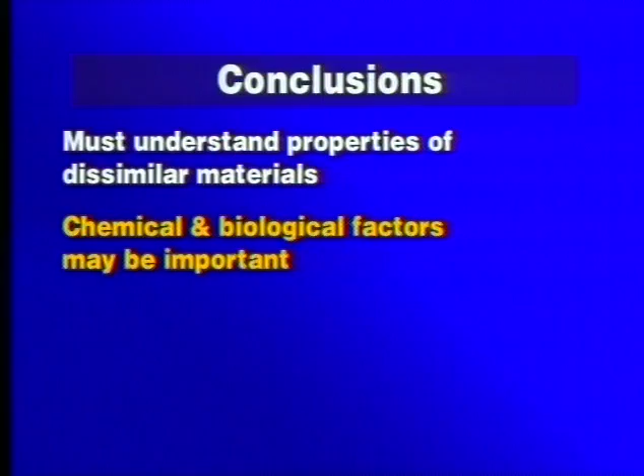They're all quite applicable. We have to give special attention to the properties of dissimilar materials. And I think one area in which we haven't done enough in our work to date is biological factors. We start talking about it in clogging of collection systems and drainage systems, all those kinds of things.

We get into the decomposition of waste and the associated settlement. We might get involved with some of those considerations. But in a serious way, I don't think many of us in the geotechnical field have looked at the importance of biological influences on our materials and on the properties with which we are dealing.

So that's what I wanted to say to you about the role of soil mechanics in environmental geotechnics, and I thank you for your patience, and I'll be happy to try and answer questions. Thank you.

Okay, it's open for questions. Do I hear any questions from the floor about the presentation? We've captured good Professor Mitchell here, and let's take advantage of it. We'll let Jean-Louis break the ice.

If you had to develop a geotechnical graduate set of courses for the 21st century, would you create some separate courses addressing environmental geotechnics, or would you try to incorporate these aspects into the existing courses?